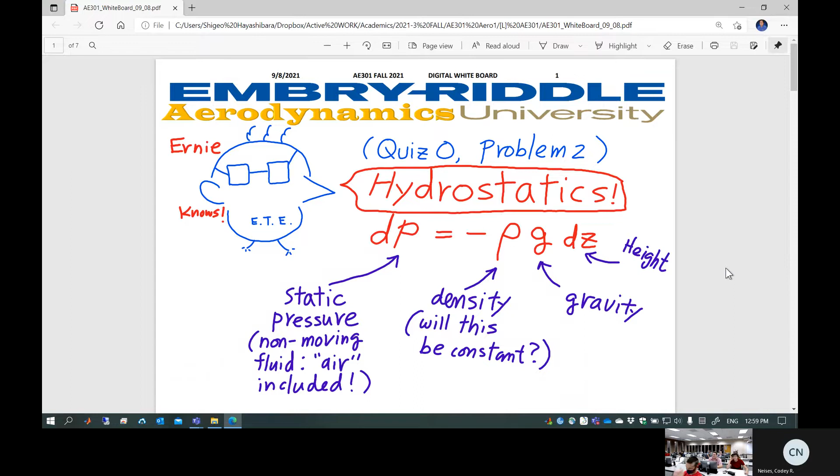So today's lecture, huh? Sure. Okay, so today's lecture - before I begin, sorry to ruin your fun, but I think I'm already recording. Okay, good. So today's lecture has nothing to do with aerodynamics.

I'm going to sacrifice one lecture today to go over fluid mechanics, hydrostatics. If you know those things, you can go home now.

If you feel confident, hey Dr. H, I know that. Because I have done quiz 0 problem 2 and quiz 2 already done. It's a piece of cake, I spent 5 minutes doing it. Go home.

I mean it, I'm not kidding. Today's Friday, go home. Question? Yes? I did most of quiz 2, but I'm kind of stuck on part C. Again, it's your decision. If you want to stay, you stay. If you want to go home, go home. How's that? Somebody please go home.

Okay, because somebody needs to break the ice, it's just weird to get - No, I'm saying it, Professor saying go home. Say all you want, it's weird. Go ahead, go ahead. Will you go over a little bit of how like the...

I'm not going to go over quizzes. I know, but I'm going to lecture fluid mechanics. I'm going to sacrifice today's class going over fluid mechanics. I'm not going to talk anything about quiz. But will you talk about - Quiz 0 is something you have to figure out based on today's lecture.

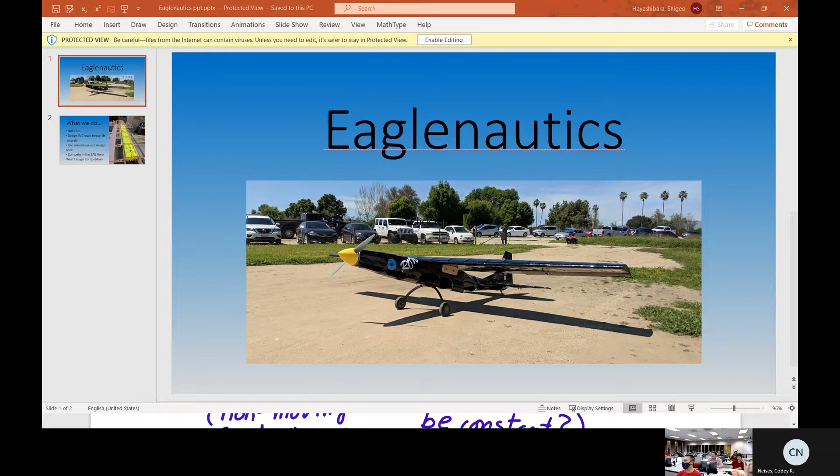Am I presenting? Okay, go ahead. So I'm Steven. Hi, Steven.

I'm part of Eaglenautics, a club on campus. We're a DBF club, and we design RC scale heavy lift aircraft, part of the SAE Aero Design West competition. In the fall semester, we design the plane with simulations and design tools, then build it in the spring semester. If you're interested in joining, talk to me after class and I can get your information.

You go to competition next year? Yes, in April, in Los Angeles, California. That's where we fly the plane. It's actually an international competition.

Two years ago, before COVID, we were 17th or so out of 75 in the ranking. The top 3 are all foreign teams, Poland, China, something like that. Those are like semi-professional teams, from all throughout the country.

But for the technical presentation, we were 2nd out of 75. Embry-Riddle's name stands out for technical presentation because the design uses a very solid foundation based on somebody's class, aerodynamics or something. It's theory based, with simulations and analysis done, very solid, and halfway convincing that this must be flying. And the payload is insane.

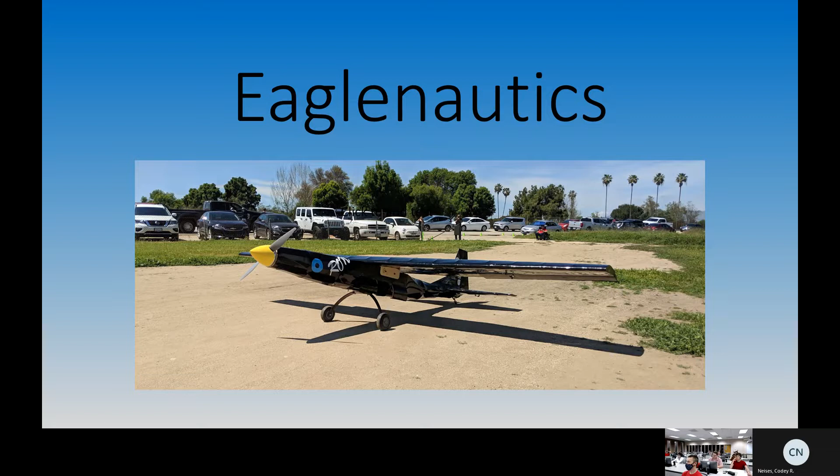If you just want to work on CAD, because we make every single part of the plane, there might be 100 or so parts we have to make in SolidWorks for the plane, so you can do that if you really love CAD. We use SolidWorks, yep, SolidWorks.

Yeah, anyways. All right, so thank you, Stephen.

So like I said, today's lecture is 100% optional. This is fluid mechanics, something you already know. So, hydrostatics, this is one of the governing equations which is quite important. There are a few governing equations I have to point out in fluid mechanics, and this is the first one. These are the key equations that everything else comes from.

Hydrostatics, okay? Have you ever seen this equation? dP is equal to minus rho g dz. This is the pressure variation if the fluid is not moving. This can be applied for any type of fluid, including liquid and gas. Now, this is aerodynamics, so we are talking about gas, okay?

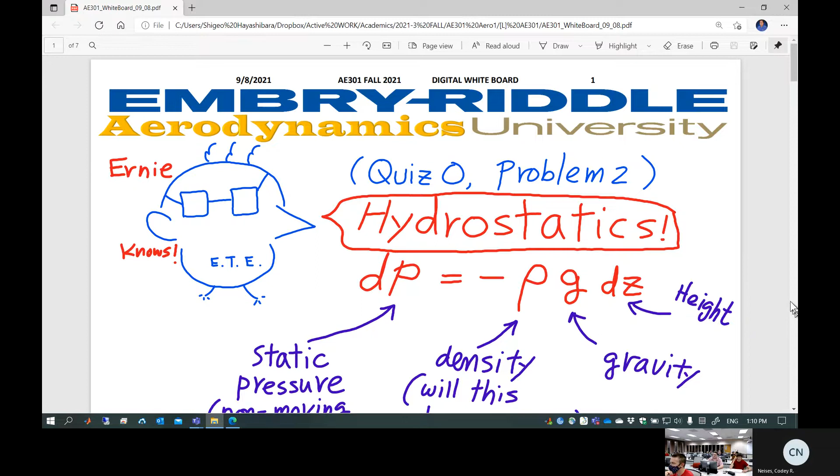So if this is fluid mechanics in liquid, there's one thing you need to be aware of. If it's a liquid, almost all the time the density is constant, because it's liquid, and that makes things super easy. That's called incompressible liquid, not moving, okay? So you can go ahead right now and tell me the equation for delta P if the density is constant.

I saw the fluid mechanics. You've seen this before. Can you tell that? Go ahead, you can try. Is it rho g delta z? Rho g delta z, correct?

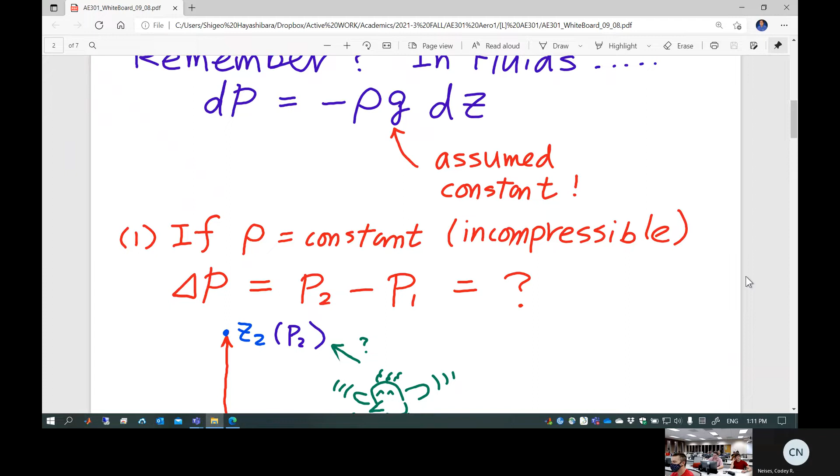Yeah, hydrostatic pressure variation in liquid. Because density is constant, let's say this is the height, and this is fluid—could be liquid, could be gas, I don't care, but density never changes. This is height Z1, pressure is P1. This is height Z2, pressure is P2.

What is the pressure difference? Rho g delta z. Actually, negative rho g delta z, because z is measured from here and up. So which pressure is higher?

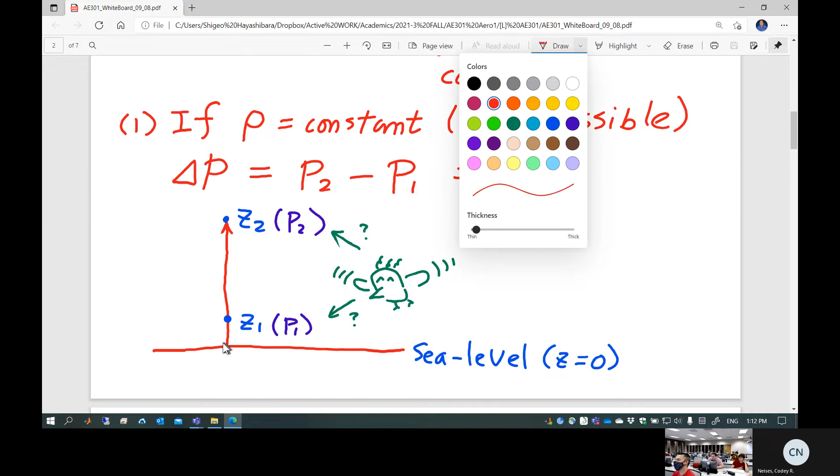The lower one, of course. If you go all the way to the sea level, let's say this is location A, okay, because that's what I'm referring to in my fluid mechanics notes. So I'm going to say standard sea level is right here. So location A, sea level, okay? If Z1 equals standard sea level, that means Z1 equals 0. That is standard sea level pressure, P_A, P_atm.

And you know the value. If it's a standard day, 14.7 psi. But if you go up and up and up and here, what is the pressure then? Negative rho g times this z.

Do you think this is accurate? It's idealized, so no. So if you keep using that kind of equation for really high altitude where airplanes are flying, you may get extremely weird values, such as negative pressure or something. Obviously it's not right, but this is one of the pressure variation equations first introduced in fluid mechanics.

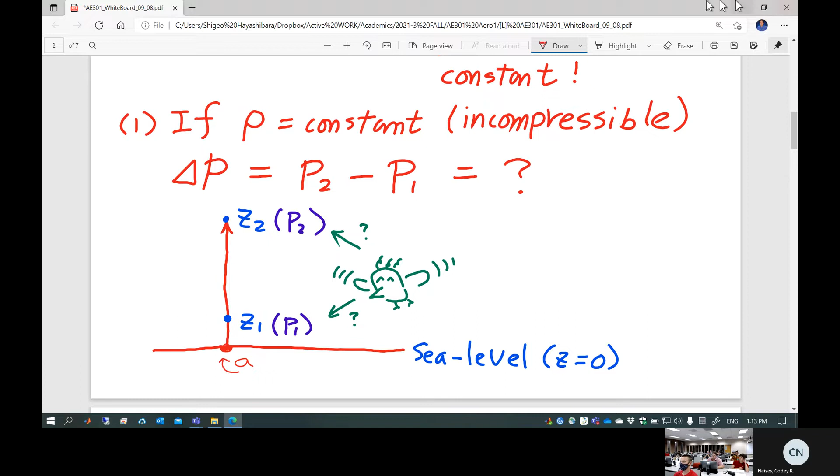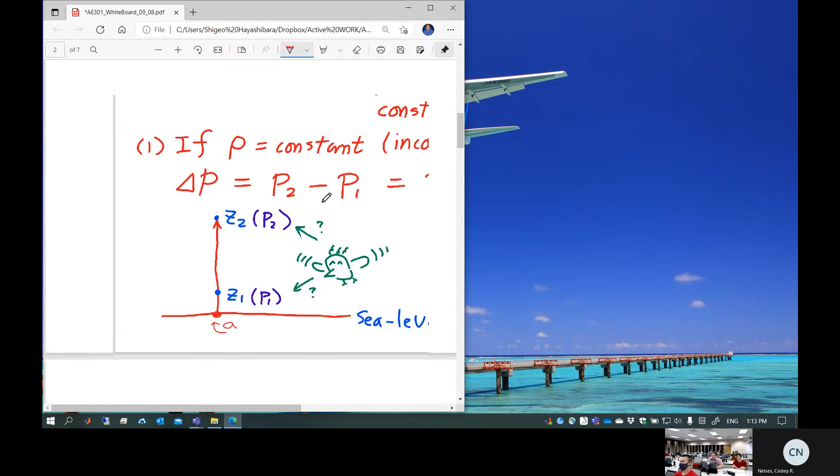Do you remember that? I hope so. By the way, I'm going to make this smaller because I want to show you something else here too in the space given. So let me open up another window.

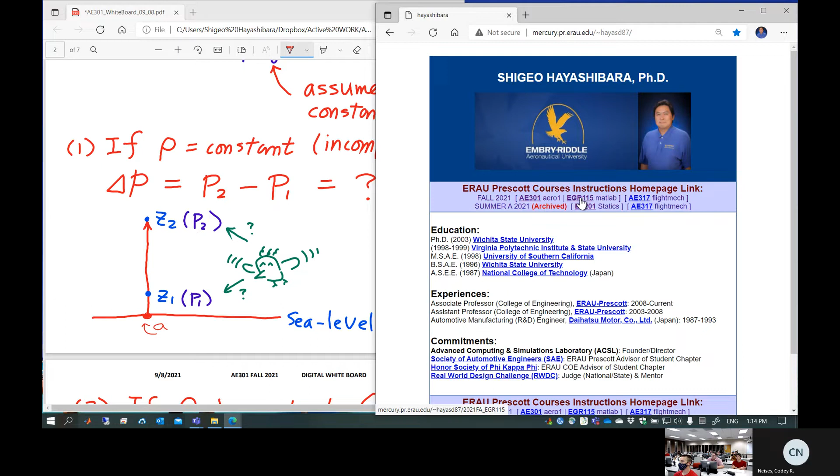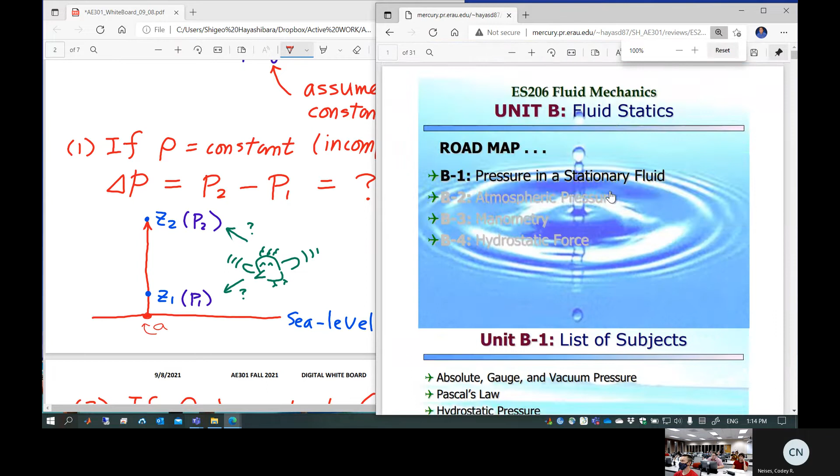So this is the prerequisite fluid mechanics. Can you still see it? It's kind of small, but let's go to Unit B. This is my fluid mechanics notes. Go all the way down here. Look at this page—this is what I'm talking about, hydrostatic pressure variation.

Of course, in fluid mechanics you're going to deal with liquid, so oftentimes depth and height are used interchangeably. But you can deal with the same kind of equation—it could be based on the height or based on the depth. Either way, one is the negative direction.

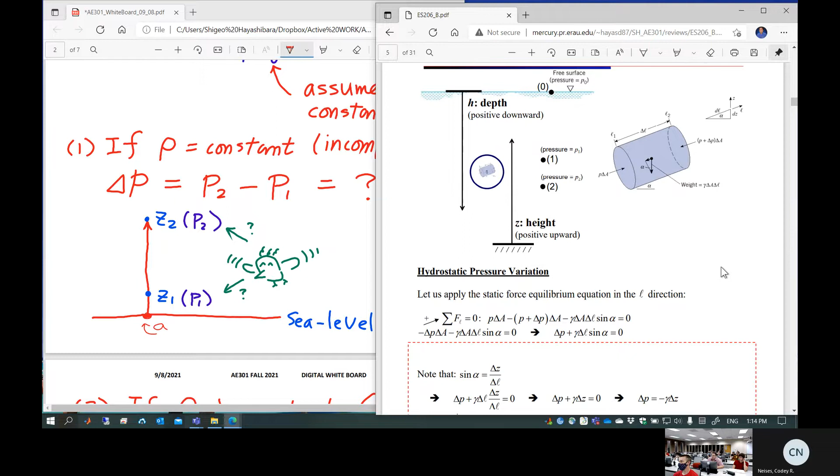Somebody was raising their hand, I kept ignoring. Go ahead. Yeah, so I was going to ask, if we are dealing with high altitudes, would we just do an integral, and then I'm assuming the density would be an equation? I don't understand what you're talking about, but you already did an integral to find out this equation. No? I'm talking about before, how you said you can't use the simplified version.

I don't understand what your question is. Simplified version, what is it? So, when you said you can't use that for high altitudes, like going— You can use it anywhere, but this is basically based on the assumption almost all the time in air. It's a wrong assumption; density can never be constant in air. So then would we use an integral with the density?

What's a integral function? What's integral? You integrate it to get this equation, right? This is the original equation. You integrate it, and integration is done based on the assumption given. The assumption is density is constant. So take a look, okay?

This is what I'm talking about. You keep saying integral, that's correct, because starting from this equation, you're going to do this: integral dP equals minus integral rho g dz. That's what you're doing. So this is always the starting point to get the pressure difference. How can you finish up the right-hand side, especially this integral? You need to have a certain condition. In this case, the condition is rho is constant, goes outside of the integral. Condition g is constant because it's fluid mechanics, goes outside of the integral.

What is the result? Delta P equals minus rho g delta Z. You did the integration to get this equation, right? Now the question is, what is the condition for integration?

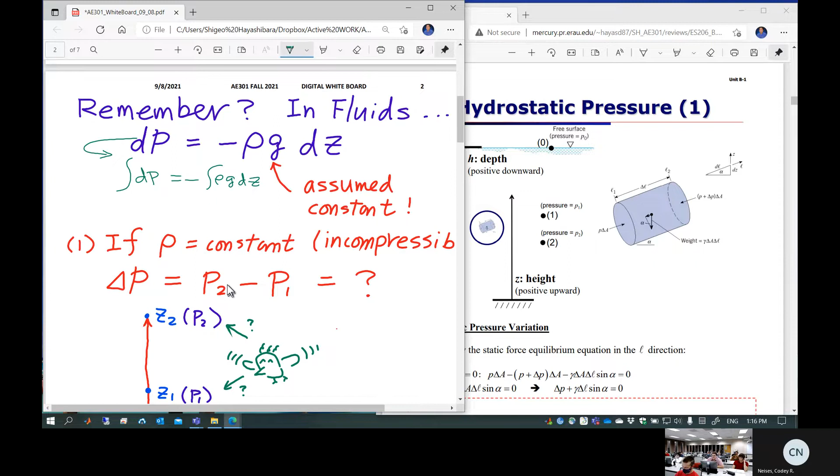Density constant—this is the condition of integration. So where can you find such a thing? This is the note, Unit B1 note of my fluid mechanics, page 4. I actually do the details of integration, starting from a small tiny element in the depth h or height z.

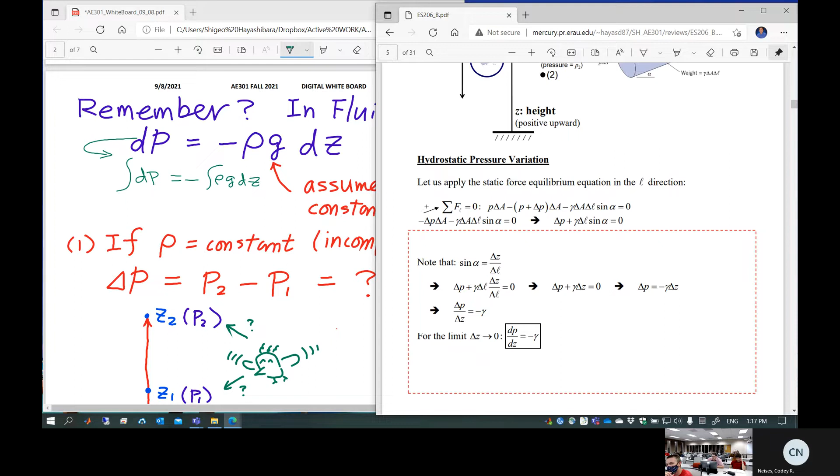You ended up having this equation. This is the hydrostatic equation, a differential equation. Next step, you have to integrate to get the pressure variation within, right? Well, that's what you're doing—integrating from this height to that height, then getting the pressure difference. Pressure difference is an algebraic equation, and an algebraic equation can only be derived from the original differential equation by integration. But integration can be done under certain different conditions.

This condition: density constant, gravity constant. That's easier—one goes outside. So delta P is minus rho g delta Z. That's what you got.

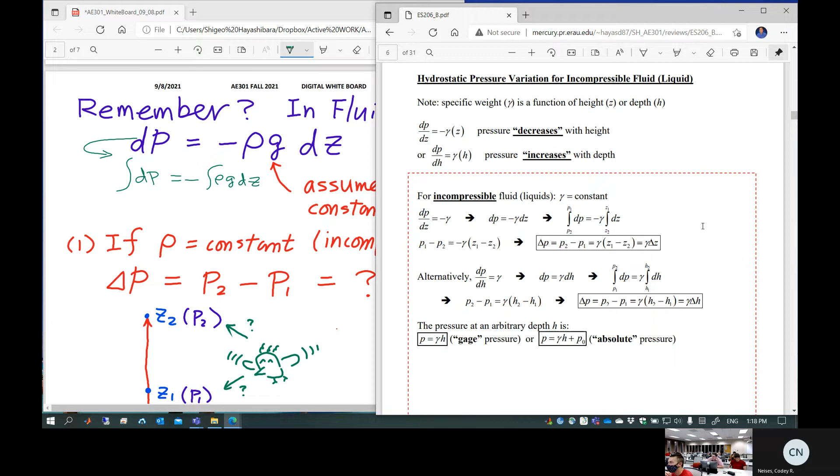And then you can find that right here—fluid mechanics notes, Unit B1, page something, I don't know exactly. You can find it, I posted it for free for you. If you don't look at it, it's your problem. Anyways, I'm not the fluid mechanics guy, so just take a look at it and explore yourself and find out. Okay, so far, okay, okay.

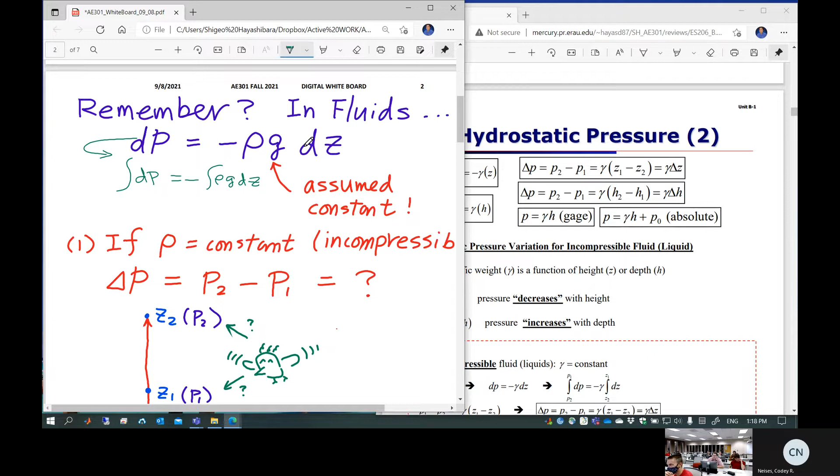Good, that's actually a very good question there. I appreciate that. Integral is the key because you need to do integration to find out the algebraic form of the equation. The question is, how do you integrate?

Next one, suppose—now we are dealing with density constant, which is a very bad assumption. We know that, so density is not constant. Of course, we're talking about the atmosphere, and density keeps changing. So I have to carry density, this variable, into our equation. We cannot assume anymore that density is constant. However, can we still assume ideal gas?

Yes, I think so—air is ideal gas. Oh yes, at a point, yes, unless you go all the way to outer space. So let's assume ideal gas.

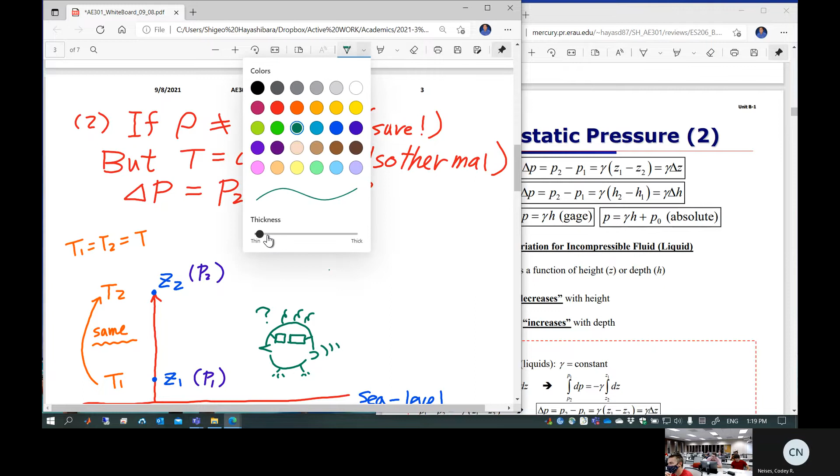So basically we're going to go back once again to the original hydrostatic equation: dP equals minus rho g dz. Now I know this rho is not a constant. Gravity is still constant—this is fluid mechanics. In aero, gravity is not even constant, but this is not aero, this is the fluid version. Gravity is constant, but density is not.

But we do know pressure equals rho RT, right? So you can say rho equals P over RT. So you just plug that back in, rho equal to P over RT. Now you're not going to deal with density, but you are going to deal with pressure and temperature instead.

Now, what if the temperature is constant? That's called isothermal, that's what I'm talking about. What if this temperature is constant? Then this constant goes outside of the integral. Here we go—I can finish up the integral and come up with a different equation than the incompressible case.

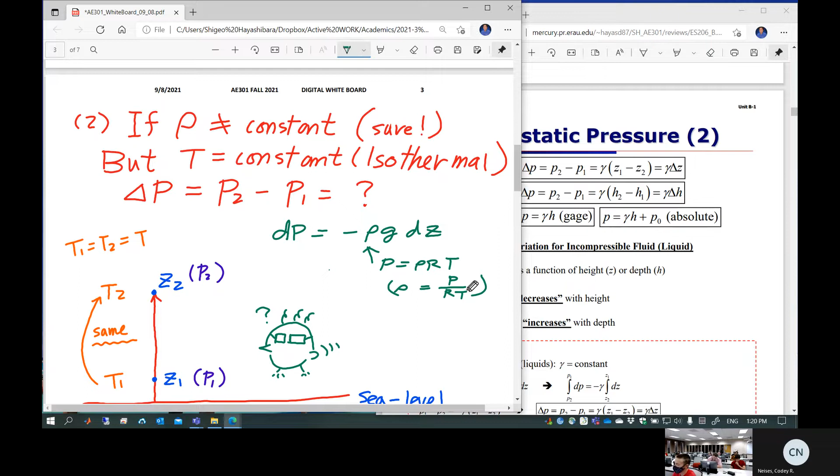I'm not going to do it because it's in the notes. Let's take a look—so that is the isothermal pressure variation.

Here we go, this page—Unit B2, page 1 of Dr. H's fluid mechanics. Now, I don't know where it is in your own fluid mechanics professor's notes, but find out. No matter who's teaching fluid mechanics, that person must cover this.

So this is the equation: if the temperature is constant throughout the atmosphere, temperature is T0, temperature doesn't change. So that means throughout this altitude, temperature stays constant. If Z1 is sea level, it's just the sea level temperature throughout.

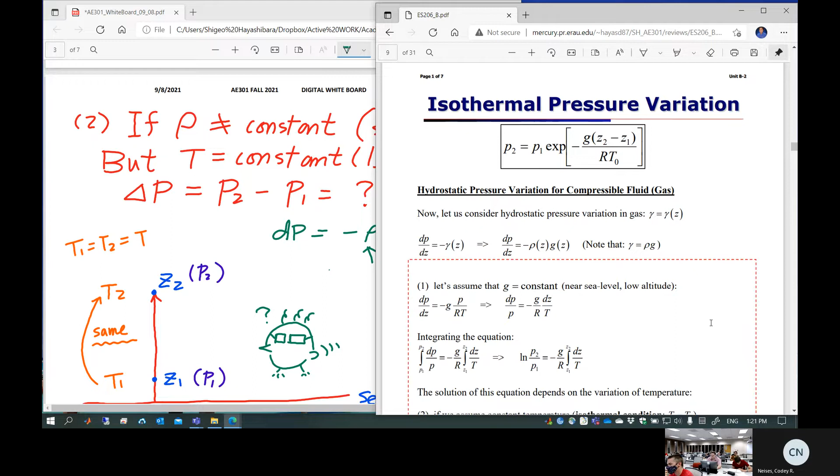Is it a good assumption? Not really, I don't think so. I climb up Mount McKinley and then, oh, I feel the temperature of Phoenix—I don't think so, no way. Temperature keeps changing, actually it keeps decreasing. If you go up and up and up, temperature goes down and down and down. It's fairly linear, but it just keeps decreasing. That's the real atmosphere—that is number 3.

Number 3 is based on the fact that temperature is not constant throughout the atmosphere, but we can model it as a linear function starting from sea level all the way to 11 kilometers, about 36,000 feet. At that point, temperature stays constant from 11 kilometers all the way to 20.1 kilometers, about 66,000 feet. This is the model called the US Standard Atmospheric Model.

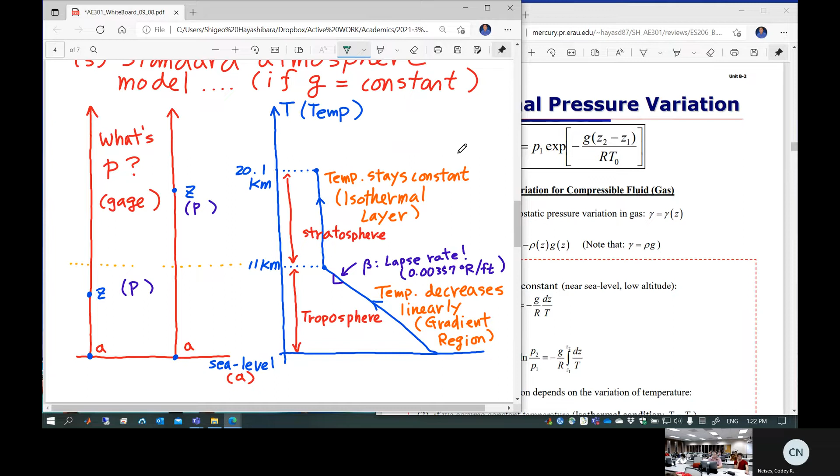In this region called the isothermal area, you already have the equation. We can use this equation for that region. This is the isothermal equation. So suppose you pick any height here and here, between those two heights you can model the pressure difference using this equation. Of course, this is the isothermal area.

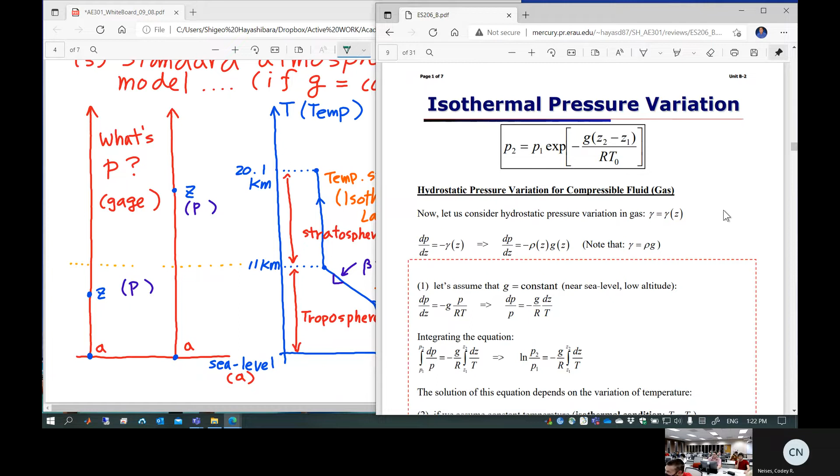That's right. The question is this region, where it's linearly changing temperature. How do you do that? Temperature keeps changing linearly, so now you're going to go back to this equation: dP equals minus rho g dz. Again, everything starts from the same equation.

Now the density is not constant, so you're going to replace this with P over RT. Now temperature is not even constant, but you can mathematically model this temperature as a linear function, and you can finish up the integral.

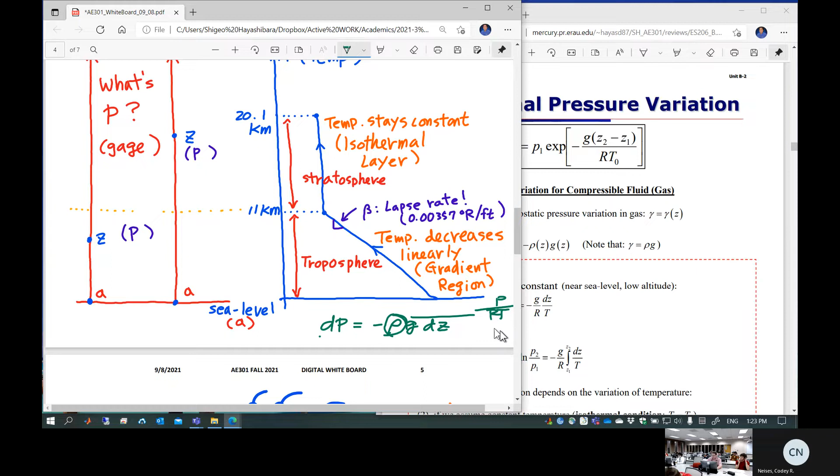So you can come up with a different version of the equation, which is right here. This is the troposphere, sea level to 11 kilometers. You can use this as a function: temperature is a linear function starting from the sea level value, temperature at sea level, T-A minus beta z. Beta is the lapse rate. So this is linearly changing temperature with respect to height or altitude from sea level up until 11 kilometers. This is called the gradient region.

But since temperature is a function of z, this temperature right here can be modeled as a linear function. How's that? This is a linear function.

So you are going to do a variable switch. Instead of integrating over z, you are going to integrate over T. So you integrate from sea level to the given altitude or height z, over the temperature, from the sea level value to the temperature value for a given altitude. Then you can finish up your integral mathematically. Then this is the equation.

Go ahead. Is beta usually just 0.00357? Actually, if you go to higher and higher altitude, it's going to look like this: gradient region 1, gradient region 2, gradient region 3. So the beta value is going to be different for each. It's just a property of the atmosphere, though.

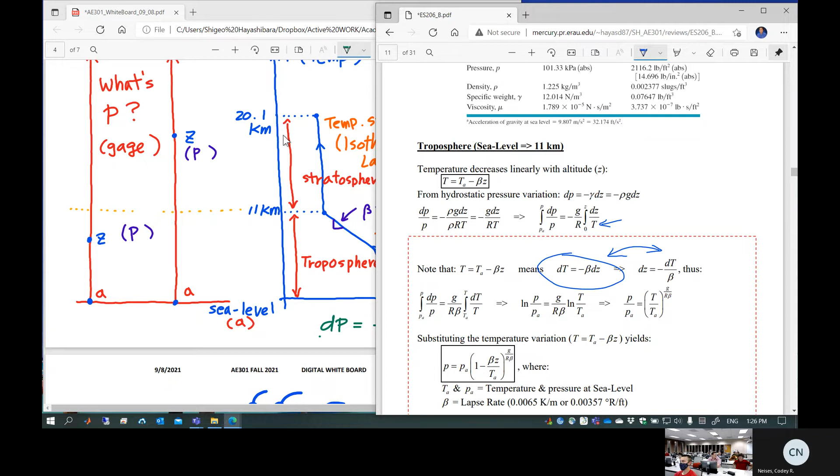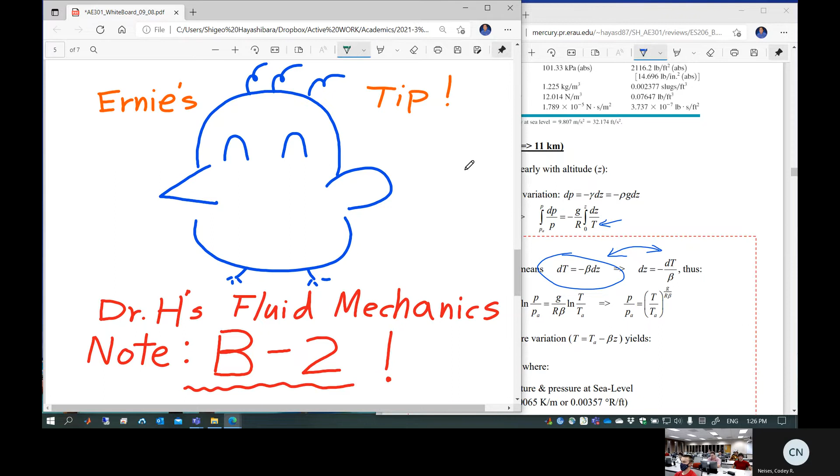This is it. So today, once again, I sacrificed my aero lecture to cover fluid mechanics. So this is Ernie's tip: Dr. H's fluid mechanics note B2, and actually B1 also. B1 is incompressible, constant density. B1, B2, that's what I'm showing here, by the way. So this is my fluid mechanics notes.

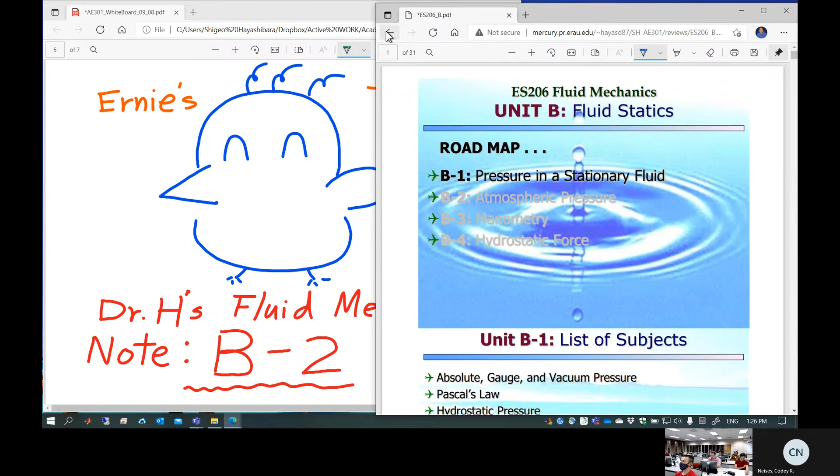You need to be all the way up. This is all about fluid statics. You can get these notes from the course homepage, Unit B, right here. Let me just zoom in more. Click here, Unit B. It's all about fluid statics. If the fluid is not moving, what kind of pressure variation can you expect?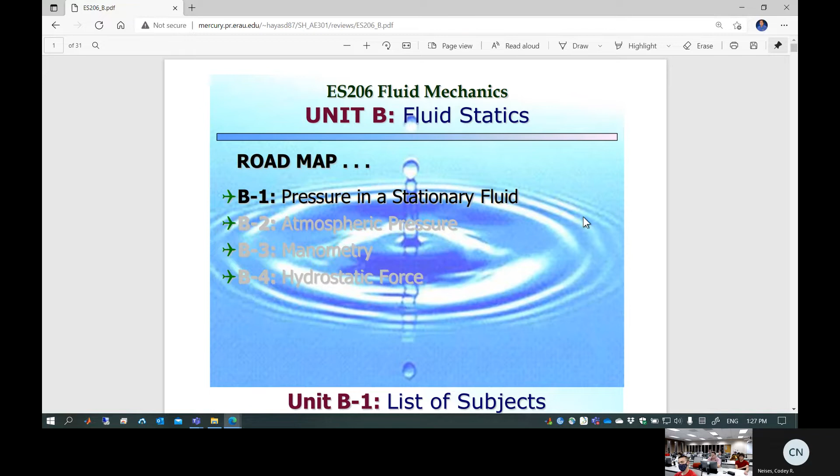It all depends on your assumption. Starting all the way from the hydrostatic equation, which is this. This equation basically says that dP equals minus rho g dz, right?

So this is basically dP equals negative rho g dz, because rho g is gamma. This is called specific weight. SG is specific gravity, based on rho over rho water. Specific gravity is different from specific weight. Specific weight is how much weight you have for a given volume.

Wait a minute, didn't you do quiz one? Yes, you know what it is. So what's the unit for specific weight? It's going to be kilogram per cubic meter, right? No. You said no? That's right.

Oh, Newton per cubic meter, that's the standard, but you can say kilogram force per cubic meter too. Fishermen do that all the time. That's engineering - a fisherman says, oh, 2 kilogram. 2 kilogram is 2 kilogram. This is not the moon, well, a fisherman will never say that. But if you go to the moon, kilogram force will be different from kilogram mass. Big time difference, right? So you have to know those things.

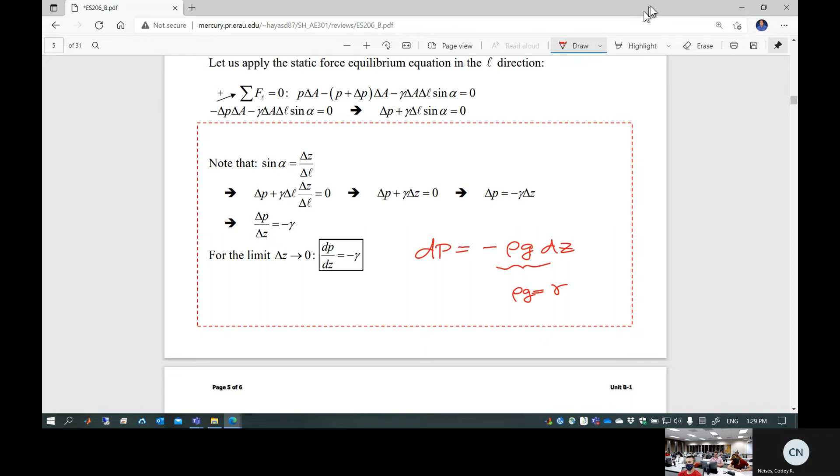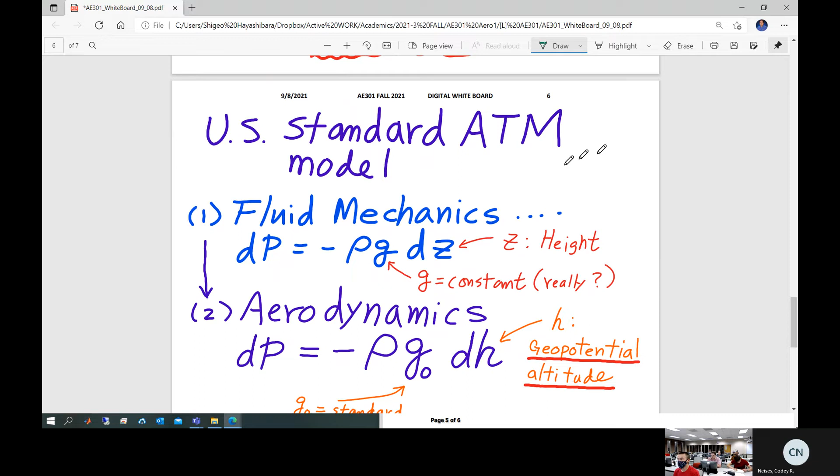Now that's not it for aero, okay? So the big change from the fluid mechanics version to the aerodynamics version is we're going to introduce altitude. Altitude comes with different definitions. If an airplane pilot says altitude, that is geometric altitude - if you have a tape measure, drop it down from your airplane, how high you are flying, that's altitude, AGL versus MSL. If you are space or astro track people, altitude means how far apart from the core of the planet - planet core to wherever the location of your spacecraft is, that's the altitude.

That's absolute altitude. Now in aero, we are going to deal with two things. One is geometric altitude, typically meaning the distance from sea level to the location of your airplane. It's called geometric altitude. However, gravity keeps changing, so we have to somehow incorporate that change. So we are going to employ something called geopotential altitude, and then use that in this equation. So here is the big issue.

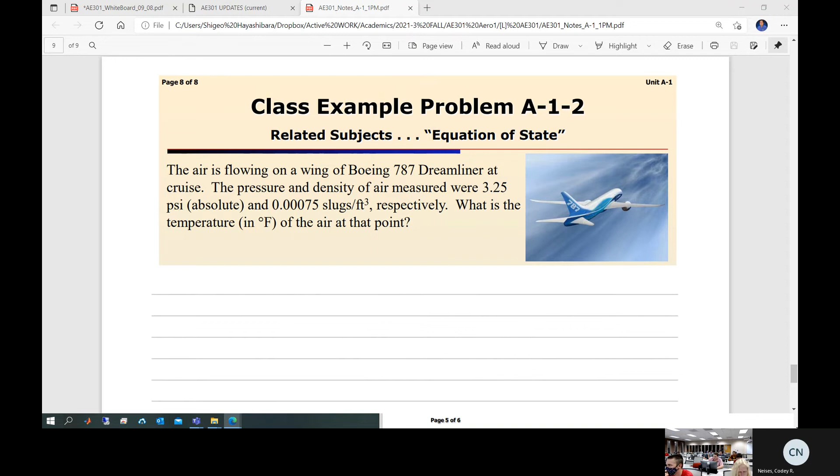Okay, so the air is flowing on a wing of a Boeing 787 Dreamliner at cruise. The pressure and density of air measured was 3.25 psia and 0.00075 slugs per cubic foot. Numbers are weird, isn't it? Who wants to use 0.00075? Because I'm sticking with standard units, slugs. So this is probably the main reason why people want to pick pound mass instead of slugs, and inches instead of feet, because it produces better numbers, but it's not the standard.

So you have to convert it always to slugs per cubic foot. But this is a nice problem because I didn't give you that weird unit, I gave you standard units. But in actual quizzes and homework, you may need to be careful about that. If somebody gives you pound mass in inch cubed, you have to convert it to slugs per cubic foot. What is the temperature in degrees F, not Rankine, of the air? Of course, this is an easy problem, let's get it done. This is almost like, oh, you don't have to do this in class kind of problem. But anyways,

So pressure is given, P.

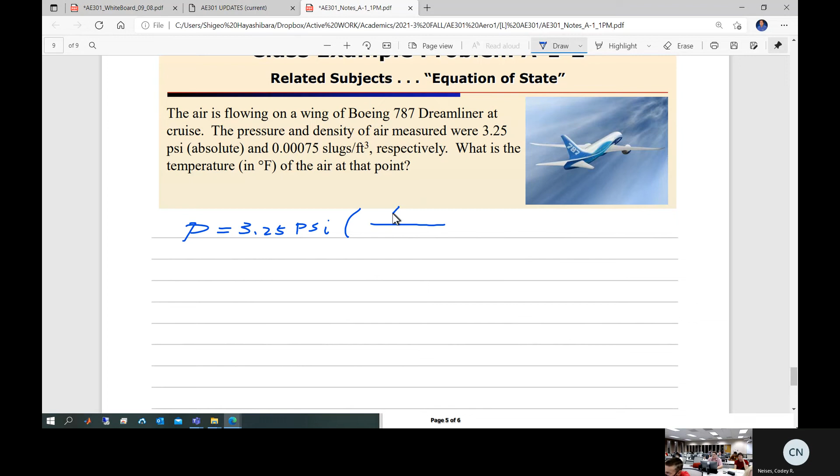Okay, so this is 3.25 psi. So I'm going to pick up this number and plug it into the calculator, right? No, the hell no. So that's just, how do you convert it?

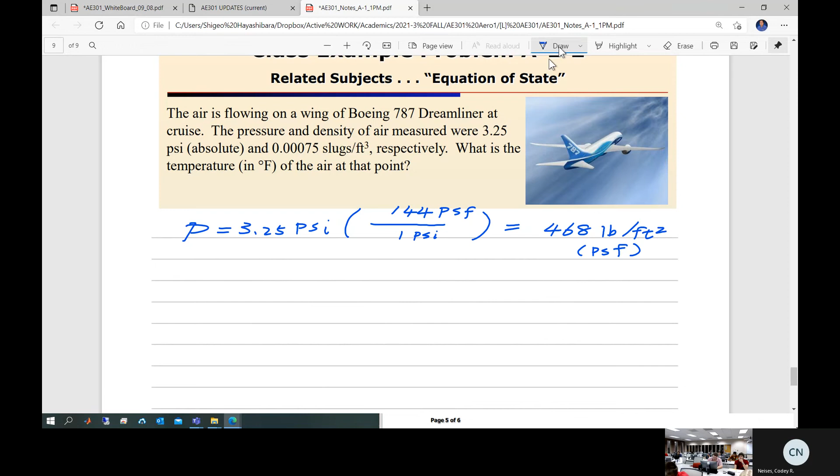Multiply by 12 squared. PSF over 1 PSI, multiplied by 12 squared. Okay, so this is going to be 468 pound force per feet square, PSF. This is the standard unit you want to use. So don't pick up this number on your calculator.

You have to use this number instead. Density is given as is, the standard unit, 0.00075 slugs per cubic foot. This is a standard unit. I'm trying to be nice to you.

This may not happen in quiz and exam. I don't know, it depends on my mood. If you're responding very nicely, I'm not going to challenge you. But if you behave like, pounds of pounds, what are you talking about, well, I'm going to challenge you for the exam. Okay, so it's up to you. This is engineer's class, it's not fisherman's class.

So temperature is P over rho R. So you can just plug in to get the temperature. T is equal to, you're going to plug in pressure. Pressure is 468 pound force per feet square, this is a standard unit. Density is rho, 0.00075 slugs per cubic foot.

What is the gas constant? Anybody? 1716 foot-pound per slug per Rankine, memorize it, it's like Rankine. The unit is foot pound slug Rankine. So you have to be very careful about the unit. In other words, if you try to cancel out all the units, you realize, hey wait a minute, Rankine remains.

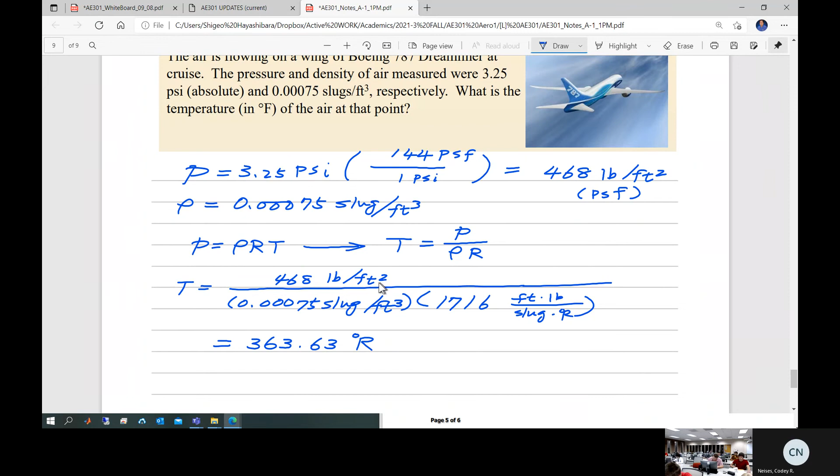So whatever the computed value here is, it's associated with Rankine. If you pick up your calculator and punch the number, this is going to be 363.63, and the unit is of course Rankine, because Rankine is the only unit that remains if you try to cancel out all of them. This is not what I wanted, you have to convert it to Fahrenheit. So the final value is 363.63.

Rankine, subtract 460 and you get Fahrenheit. Oh, it's negative? Oh my goodness. Minus 96.37 degrees Fahrenheit. Do you think you can survive if you try to sneak into the cargo compartment, non-pressurized, or maybe inside the landing gear box? You'll be dead, guaranteed.

Okay, so something you need to know. This is the cruising altitude of a passenger airplane. This is probably a transonic airplane, so high altitude, probably 36,000 feet cruising altitude. If you're not pressurized, I don't think you can survive, just looking at the temperature alone.

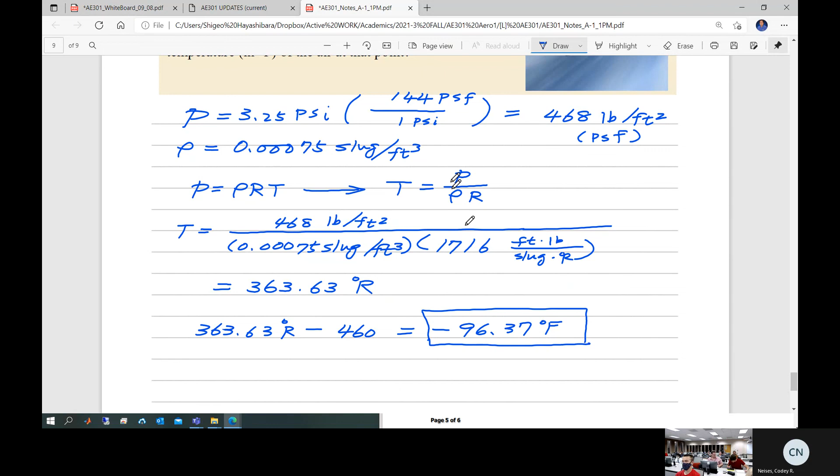So that's actually going to lead you to the next subject. Next subject is going to be unit A2, right? If you go to the course material, it's nicely lined up for the order of lecture moving forward. So we are done here. Now next step is, of course, we're going to take a look at unit A2, standard atmosphere. This is entirely based on fluid mechanics, fluid statics, that's the lecture for today.